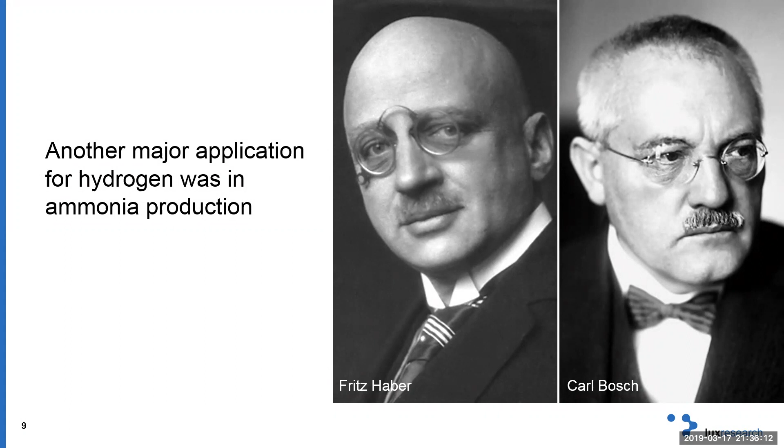In the 20th century, Germany did not have access to nitrates and ammonia because of the war. So two German scientists, Haber and Bosch, developed the Haber-Bosch process so that Germany could produce its own ammonia from hydrogen. And that application was a tremendous success.

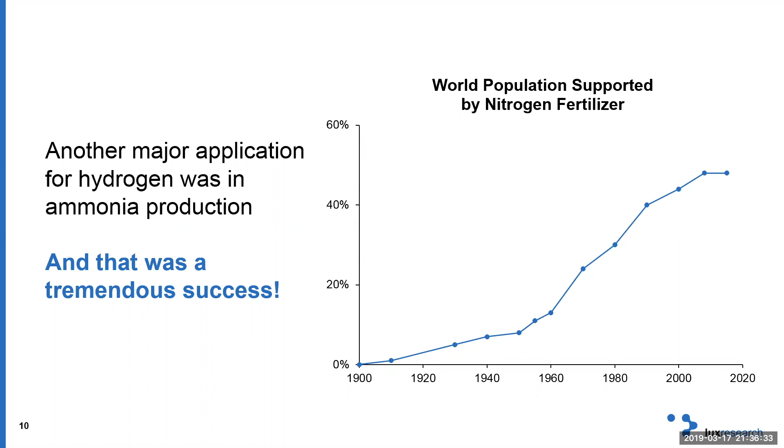So you can see a pattern emerging here. When a problem emerges, hydrogen is brought forward as a solution. And sometimes it works out, sometimes it doesn't. Hydrogen was very successful in industrial chemistry, but that was a long time ago. So let's jump forward and look at some of the new problems it's trying to solve.

What about the problem of energy security? Back in the early 1970s, OPEC announced an oil embargo against the US, which crippled the country and brought to light the issue of energy security. What can you do when your main energy supplier decides to cut you off? Well, you can start by producing your own energy, so you don't ever have to rely on someone else. And this is when the concept of a hydrogen economy started to pick up.

So why was hydrogen even brought forward as a solution to this problem of energy security? On paper, it makes perfect sense to replace diesel and gasoline with hydrogen, because you can produce the hydrogen locally, which means you don't depend on anyone else for energy. You only need electricity and water.

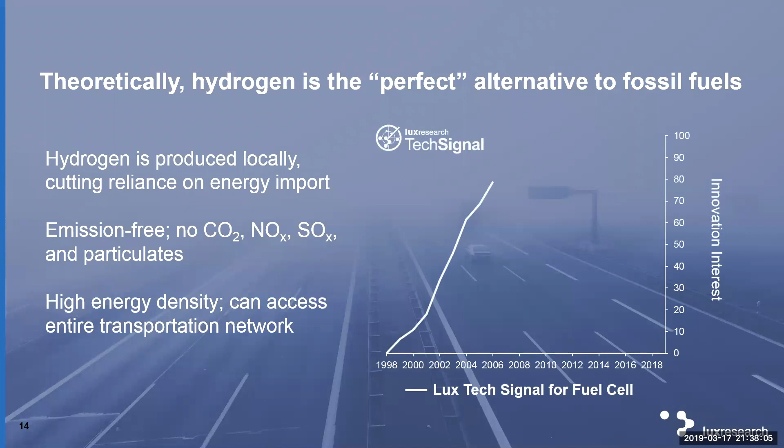Hydrogen burns clean, which means you have no emissions at all, whether it's CO2, nitrogen, or sulfur emissions. And finally, hydrogen has a high energy density, which means you can not only use it in cars, but also in trucks, and eventually in ships and airplanes as well. And this is why interest in hydrogen as a transportation fuel has shot up over the years.

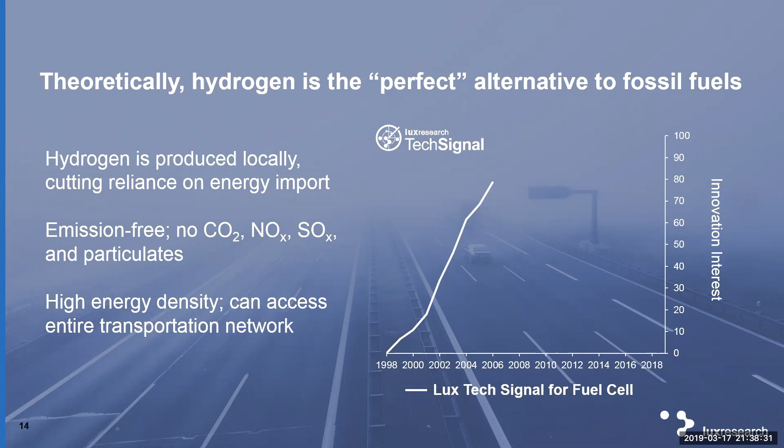The engine of a hydrogen economy is the fuel cell. As you can see from our Lux Tech Signal, which tracks innovation interest in a particular technology, innovation interest in the fuel cell experienced very rapid growth in the early 2000s, as many automakers around the world were rushing to be the first to launch a fuel cell vehicle. So at the time, hydrogen was very popular.

But then cracks started to appear in this hydrogen economy. Even though the fuel cell vehicle was launched commercially, we quickly realized we weren't producing enough hydrogen to support the widespread deployment of these fuel cell vehicles. And even if we were producing enough hydrogen, there was no way to get it to the customer because there was no hydrogen infrastructure for distribution. Building this infrastructure, as you can imagine, would take a very long time.

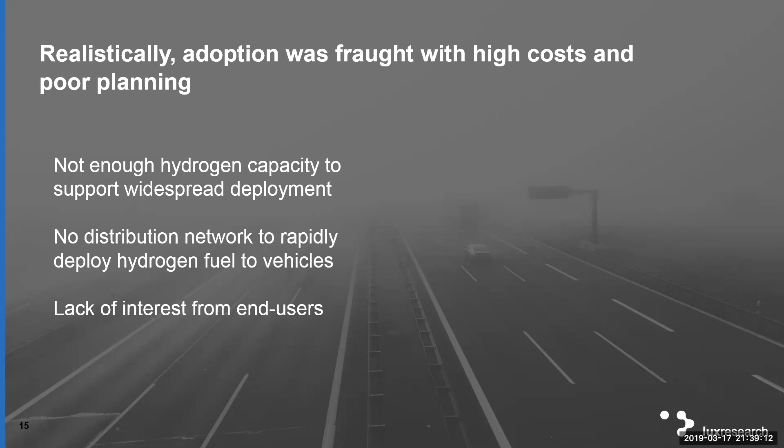And because of all these problems, customers quickly lost interest in the fuel cell car, because what is the point of having a hydrogen car if you can't even get hydrogen in the first place? This is why innovation interest in fuel cell technology has constantly decreased since 2006, when innovation interest peaked. And even today, innovation interest continues to drop.

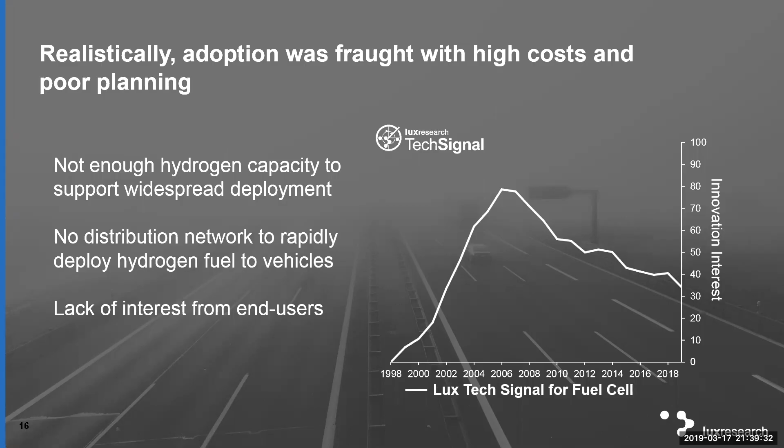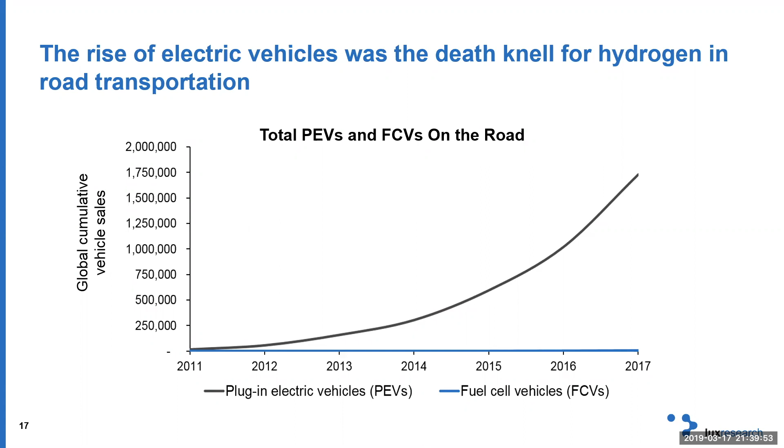And then, as if that wasn't enough, hydrogen received a crushing blow from the electric car. As you can see in the figure, back in 2011, electric vehicles and fuel cell vehicles were pretty much head-to-head in terms of sales. But over the past 10 years, the sale of EVs has continued to increase, while fuel cell vehicles still struggle to gain adoption. Now, looking at these sales figures and the trends in the industry, I think we can all agree that for passenger cars at least, electricity has won the race against hydrogen.

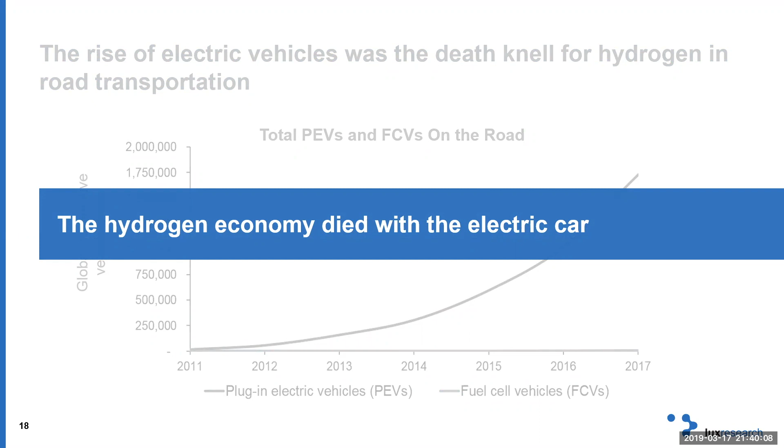This is because in 2015, something happened that brought hydrogen back into the conversation. We had the Conference of Parties for the Paris Agreement, where countries around the world gathered and agreed that we need to reduce greenhouse gas emissions by any means possible. With this, hydrogen found a fresh new problem to solve: limiting global temperature rise to less than 2 degrees Celsius.

That problem is the largest hydrogen ever had to tackle, because it's not only a global problem, but it spans across all sectors, meaning there's no one-size-fits-all solution. But hydrogen isn't the only one trying to solve this emission problem—there are a lot of other technologies trying to do so as well. So really, the key is identifying which sector presents the biggest opportunity for hydrogen.

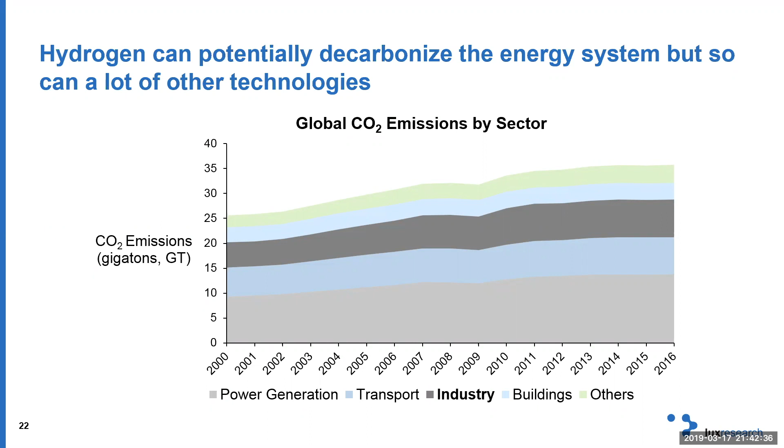The emission problem in industry can be split into two. The first problem is heat. The industrial sector consumes a large amount of heat to run its operations, and that heat comes from combustion of natural gas or coal. So how can you use hydrogen to solve this problem?

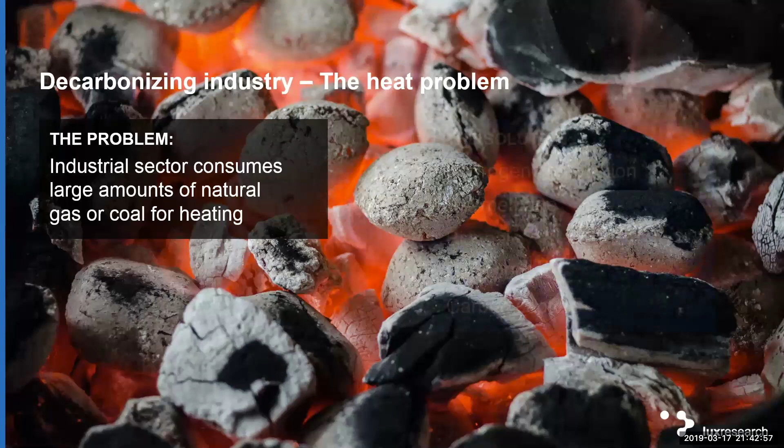Well, you simply replace natural gas and coal with hydrogen combustion. But you can also replace natural gas and coal with biomethane or biocoal. Or you can bypass combustion altogether and use industrial heat pumps. Or, if you don't want to move away from combustion, you can build a carbon capture unit in your facility to capture all of your emissions.

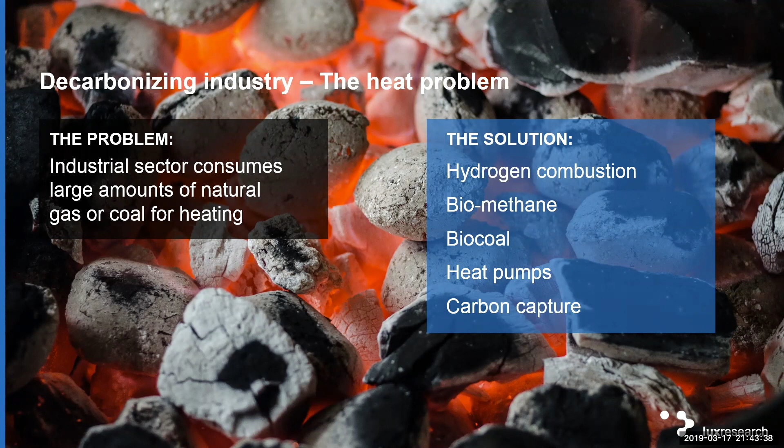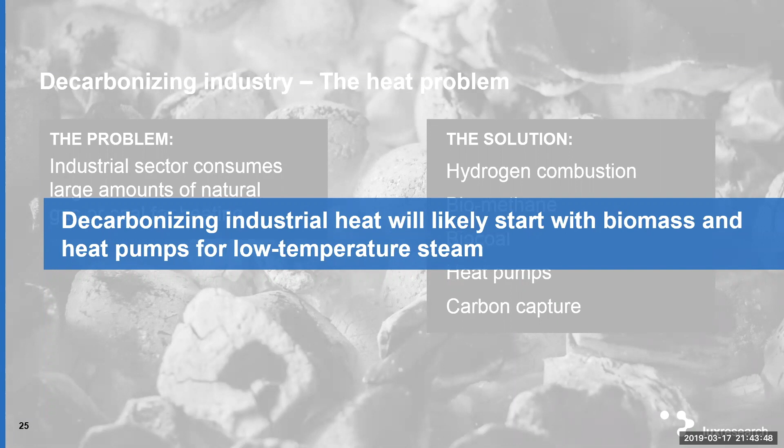So is hydrogen the right solution here? Today, 75% of the energy used as heat in industry comes in the form of low to medium temperature steam. So if you want to start decarbonizing the sector, you start with low temperature steam, and in this case biomass and heat pumps will likely be used first. So for the heat problem in industry, hydrogen only becomes relevant for high temperature processes.

The second problem facing industry is the feedstock problem. The chemicals and refining industry uses a lot of hydrogen as feedstock for their products, and all of that hydrogen today pretty much comes from natural gas. Natural gas is a fossil fuel, and if you want to go green, you'd have to find something else—and that something else is green hydrogen. You're still using hydrogen, but instead of it coming from natural gas, you produce it from water electrolysis powered by renewable electricity.

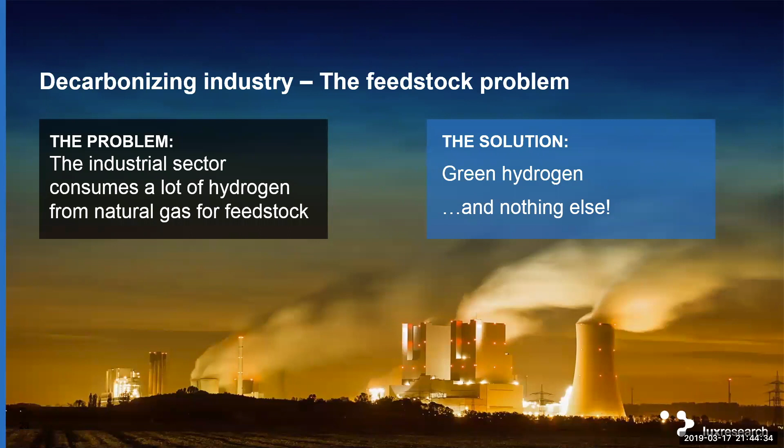But what about the other competing solutions to this problem? Well, there aren't any, because this problem is unique in that you just cannot replace hydrogen with something else. This makes it the perfect problem for hydrogen to solve, because here hydrogen itself is the problem—or rather, the source of hydrogen is. Since you can't replace hydrogen with anything else, your only solution is to use green hydrogen.

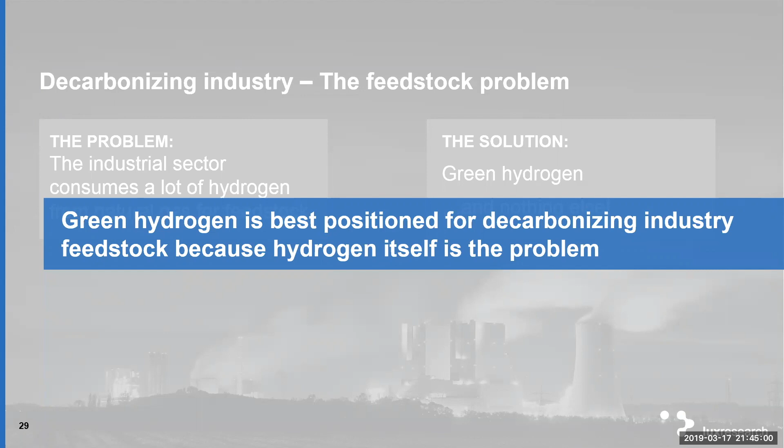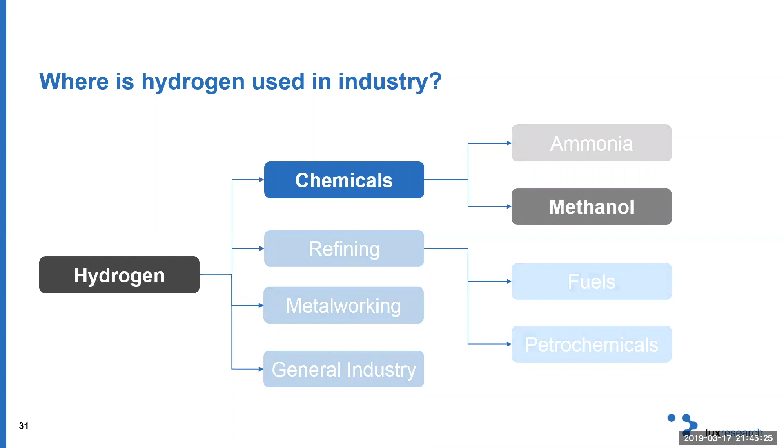So now the question is, how easy is it to replace fossil hydrogen with green hydrogen? Before we answer that, let's look at where hydrogen is used in industry today. The majority is used in chemicals and refining, with some also used in metal working. Within the chemical sector, ammonia and methanol are the two main products made from hydrogen. So for today's webinar, we'll take a closer look at how we can integrate green hydrogen into methanol production.

Today, methanol is produced from natural gas. Hydrogen in this case comes from reforming of natural gas and is then used to produce methanol by combining it with carbon monoxide and carbon dioxide. So this is the incumbent process for methanol production.

If you want to use green hydrogen from electrolysis, you replace the steam reformer with an electrolyzer. But that only gives you hydrogen, and you still need a source of carbon. Since you want to produce green methanol with low or zero emission carbon, the simplest option is CO2 from carbon capture.

So you have your fossil-based hydrogen process and your green hydrogen process for methanol. Obviously, using the green hydrogen process is more expensive because if it wasn't, everyone would be using it today. So how do you force people to move from cheap but dirty methanol to green but more expensive methanol?

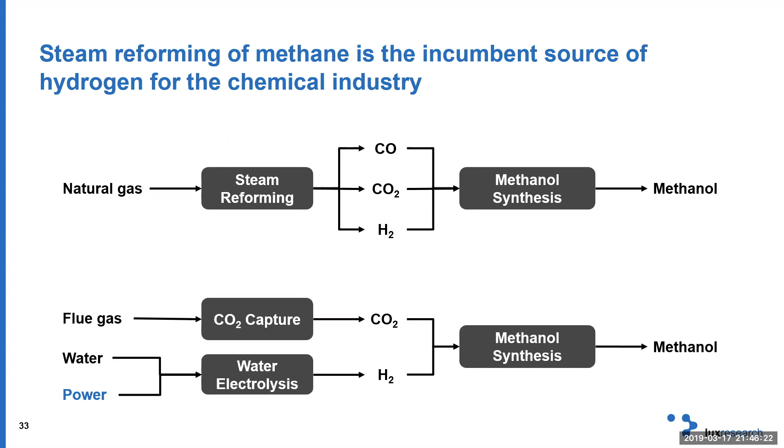You simply use carbon taxes. Producing methanol from natural gas results in CO2 emissions, whereas the green pathway is a carbon negative pathway since you're using CO2. So if you start penalizing people for emitting CO2, then they won't want to produce CO2 anymore. Which now brings us to the question: how high do carbon taxes have to be such that green hydrogen is cost competitive with fossil hydrogen for methanol production?

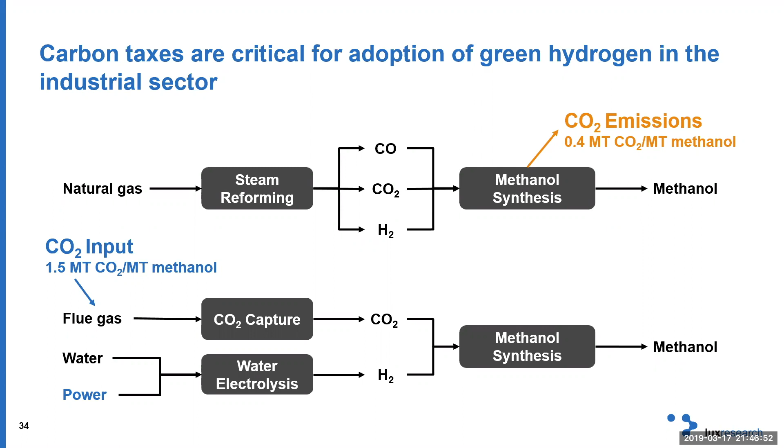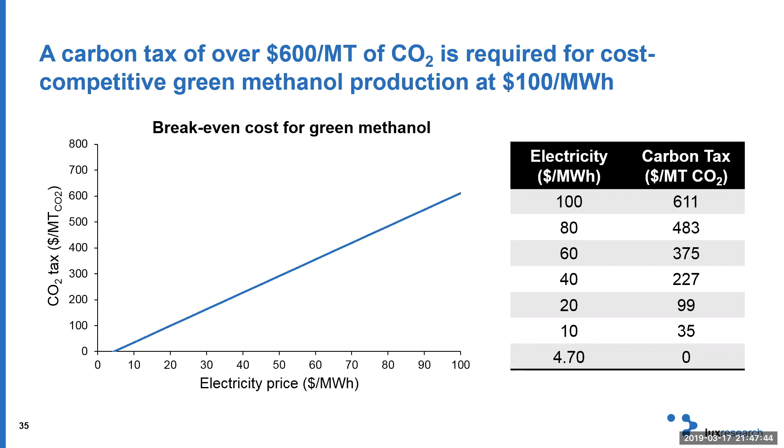As the price of electricity goes down, so does the carbon tax requirement. Now, the price of industrial electricity varies in different countries, but $100 per megawatt hour is a good estimate for an average. And clearly, at that price point, you would never be able to make green methanol because it's just too expensive. So what can you do?

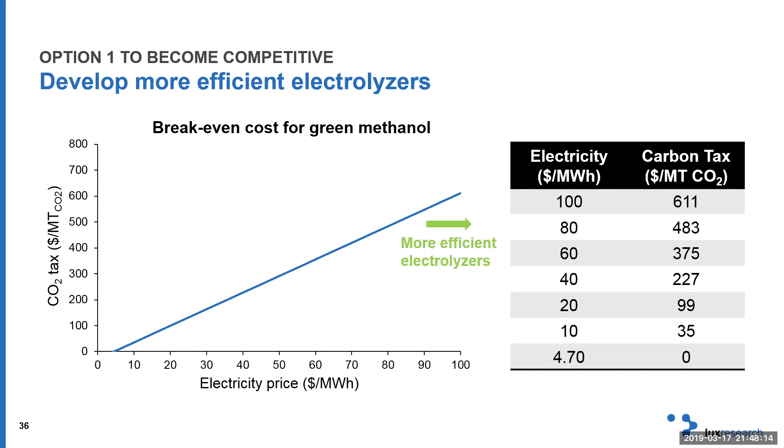Well, you could develop more efficient electrolyzers. If you increase the efficiency of electrolysis, you'll be moving the line to the right, which means you require a lower carbon tax for the same price of electricity. But today, electrolyzers are as efficient as they can be. And even if you increase the efficiency of electrolysis by 3, 5, 10%, which would be a great achievement but very challenging, it still won't have a big impact. So relying on more efficient electrolyzers is just unrealistic.

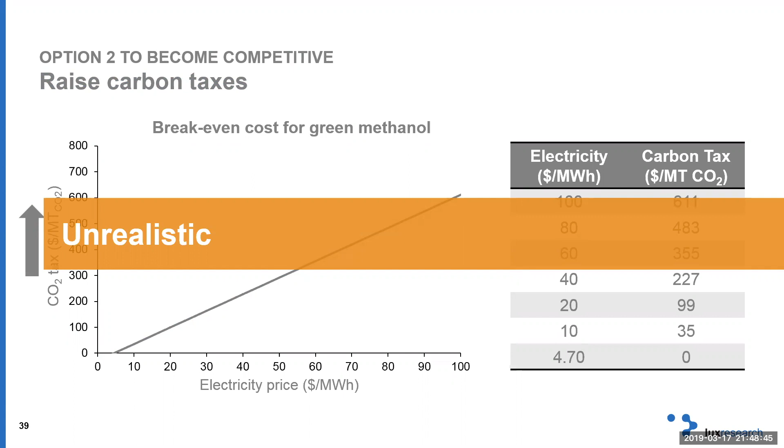Your second option is to wait for carbon taxes to go up. Today, carbon taxes around the world are anywhere between $5 to $50 per ton of CO2, and they keep on increasing. But how long will it take till we reach $600 per ton of CO2? It's very challenging to implement or raise a carbon tax in many countries around the world, which is why if you wait for governments to do that, you'd be waiting a very long time. So this option is also unrealistic.

Which leaves us with our third and last option, which is simply to find a source of cheap electricity. Because if you have cheap electricity, then you would need a lower carbon tax to offset your costs. And remember, you want to produce green hydrogen, so that electricity has to be renewable. So is it possible today to find cheap renewable electricity?

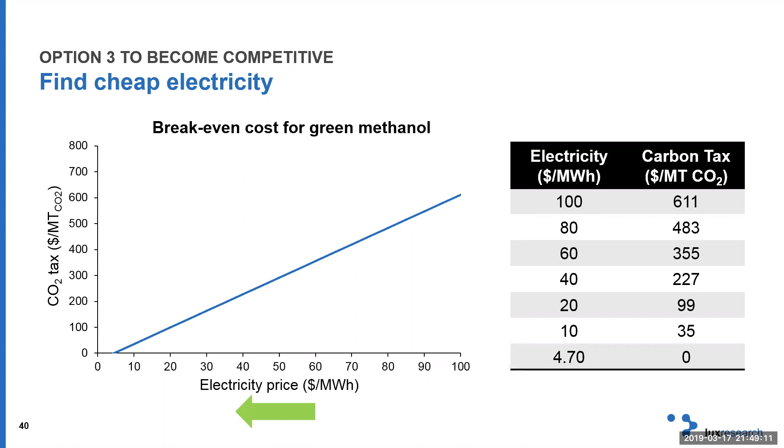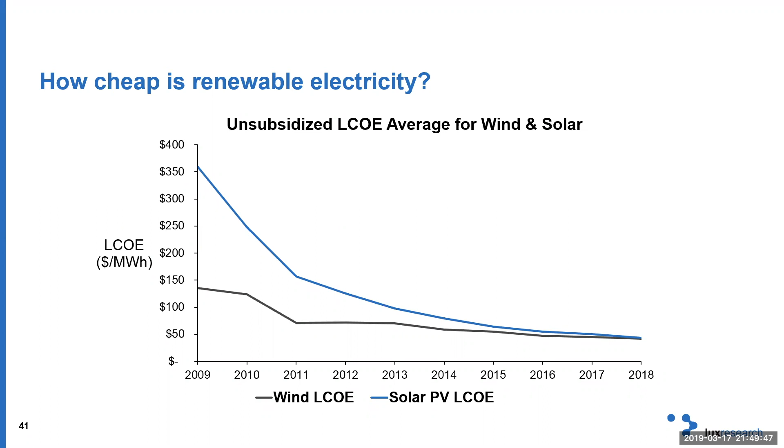The question is, where can we find this cheap renewable electricity? Well, we can all go to Saudi Arabia, for example. Last year, EDF Renewables and Masdar won the contract to build a 400 megawatt wind farm in Saudi Arabia. This project will be selling electricity to the power company at a price of just $21 per megawatt hour, which is extremely cheap. Now, there are likely subsidies involved here, but it shows you that cheap renewable electricity is already a reality today, or it will be once EDF and Masdar build that plant.

So let's say, for example, that Masdar and EDF decided to produce methanol using electricity from this project, then they would only need a carbon tax of $100 per ton of CO2. It's still a high carbon tax, but it's not so unrealistic if you are serious about cutting down our emissions.

So when it comes to green hydrogen, relying on getting cheap electricity is actually a realistic option. Remember how earlier we said that hydrogen is a solution looking for a problem to solve? Well, hydrogen has found its new problem, and that problem is decarbonizing industrial feedstock.

But this is not something that will happen now. It will take a long time for us to get there, to get a large amount of cheap electricity together with high carbon taxes, which are the two things that you need before deploying green hydrogen in industry. But as you wait, here are some of the things that you can already start doing.